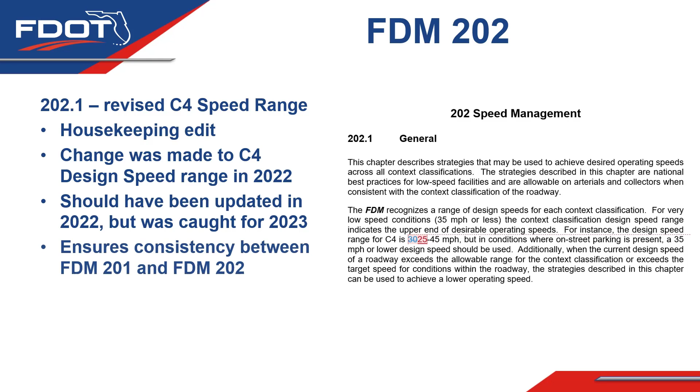Similarly, in FDM 202.2.1, we added that the target speed requirement is only for non-limited access facilities. This was stated plainly in FDM 201, but was not clearly stated in FDM 202. So this change, again, was a housekeeping edit. It was modified at the request of the districts just to ensure there is consistency between these two chapters. So that's all that was made there, and it's really just to provide that consistency.

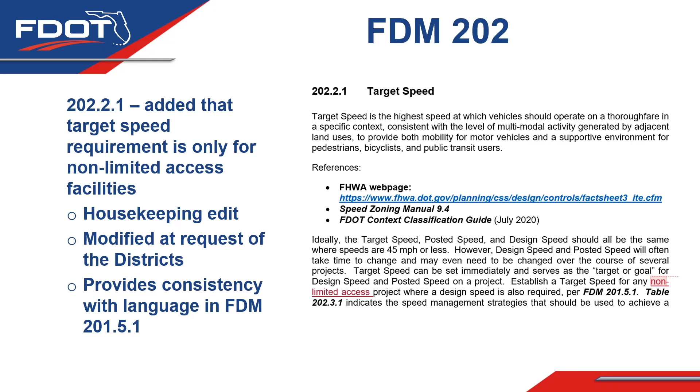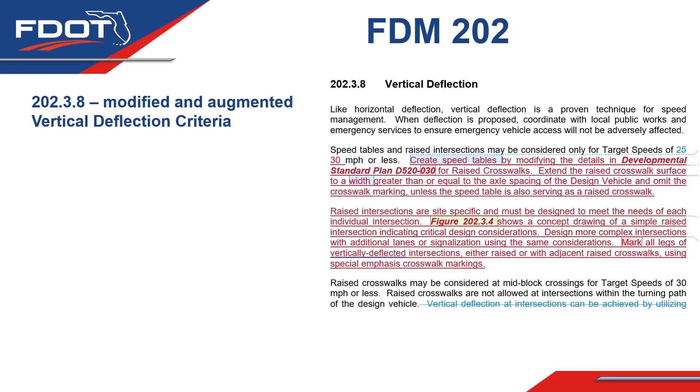The following changes were actual changes to criteria for 2024. The first one that we're going to talk about is the modification to 202.3.8, which is a modification and also a change or augmentation to the vertical deflection criteria that are found in this chapter. These modifications were made based on reviews of raised crosswalk projects that we've looked at over the last several years.

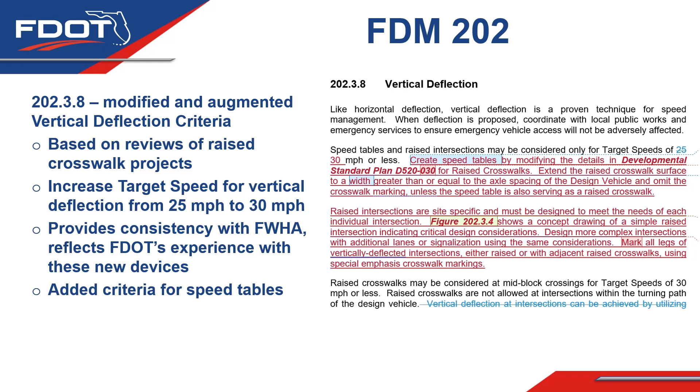We also increased the target speed for vertical deflection from 25 miles an hour to 30 miles an hour. And we made these changes mostly to provide consistency with FHWA, but it also reflects FDOT's own experience with using these new types of devices on our roadways. We also added criteria this year for speed tables, and we'll talk more about where that came from and what that looks like now. And we added some criteria and concept drawing for raised intersections, which are related to speed tables, and we'll talk about that as well over the next few slides.

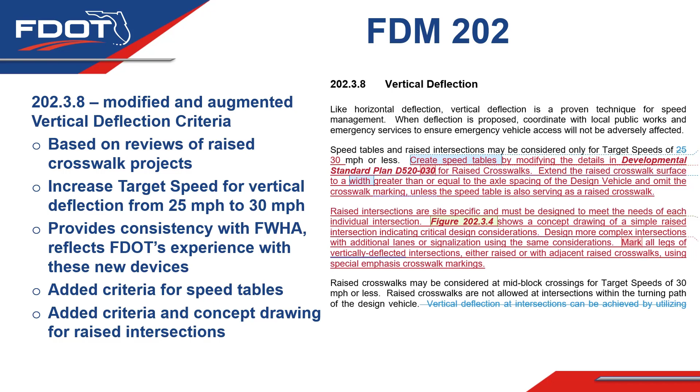So, increasing the target speed for vertical deflection to 30 miles an hour from 25 miles an hour. The way this used to work, as we said, you could use vertical deflection on roadways as long as you were trying to achieve 25 miles an hour or less. We did not really want you to apply those on roadways that we expected to operate at 30 miles an hour. However, since the original rollout of this criteria, we've had more experience with these types of devices and determined that it would be okay to use them on 30 mile an hour roads.

So if you're trying to get a road to 30 miles an hour, you can still use these vertical deflection devices. This is consistent with the language from FHWA as well, and it's consistent with the way the districts are actually using these devices, and we don't see any negative consequences of doing this, so we went ahead and made this change in the FDM.

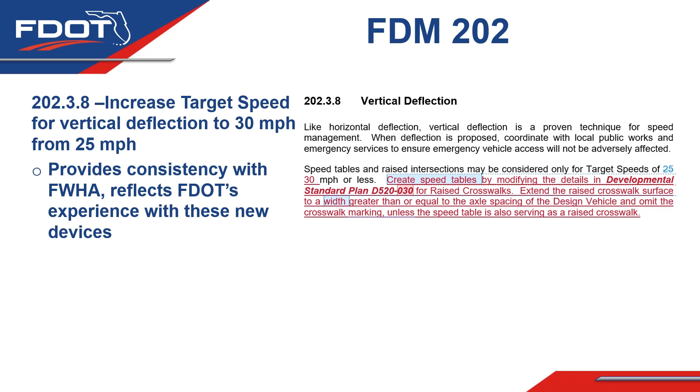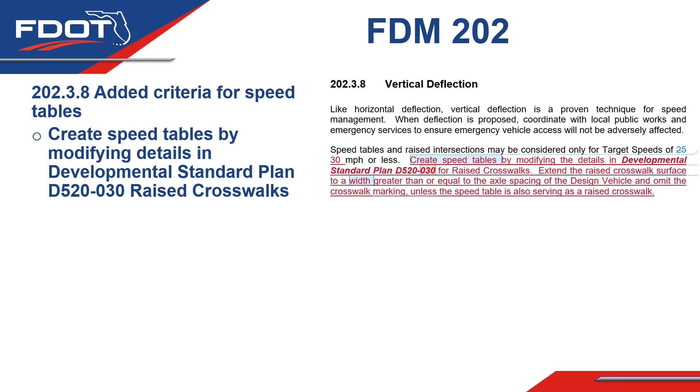Even though this raised crosswalk is wider than a conventional speed hump, it can create a bit of a rough passage for some types of vehicles crossing these things. And so the countermeasure for that was to use basically a wider raised crosswalk table, which we would call a speed table. So I'm trying to explain sort of how this is put together and how it works with the criteria that we have there. So the language says, create speed tables by modifying the details in Developmental Standard Plan D520-030 for raised crosswalks.

Extend the raised crosswalk surface to a width greater than or equal to the axle spacing of the design vehicle, and omit the crosswalk marking unless the speed table is also serving as a raised crosswalk. Well, let me explain a little bit what all that means.

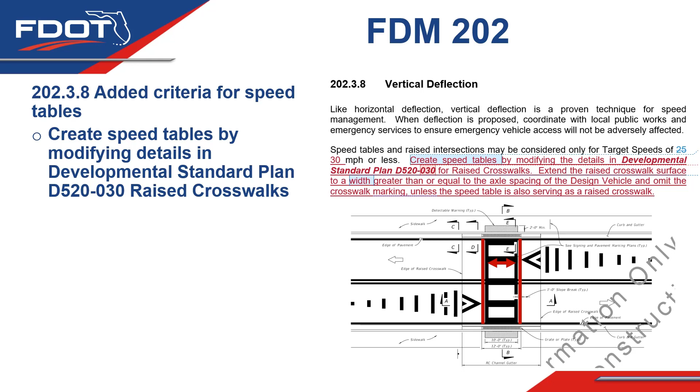And the way we show to do that is, these red lines represent where the edge of the tabletop would be for a raised crosswalk, basically as wide as the raised crosswalk. You want to extend that tabletop out so that it's going to be at least as wide as the wheelbase of your design vehicle. So in this case, we're showing the design vehicle as a city bus, which has a wheelbase of 25 feet. So I would want this to be at least 25 feet, probably a little bit wider, to accommodate that vehicle. If you had a different design vehicle with a different wheelbase, you could use that.

So maybe you're designing around a fire truck or something like this. City buses tend to be the most common thing that we're seeing. You'll need to check with your transit company locally and see what bus they use, but this is one of the city buses that's from AASHTO, and so we were using it for this example. So the idea is you want to extend this tabletop out so that it is at least as wide as this wheelbase, and this will provide a smoother crossing for that vehicle.

You can omit the crosswalk marking if you are only using this for speed management. Now, if you are also using it as a mid-block crosswalk, then you can leave that marking in. It can be put in the middle, it can be put on one end or the other. You really have a lot of flexibility as to where exactly you would put that crosswalk marking. So just use your best judgment on that.

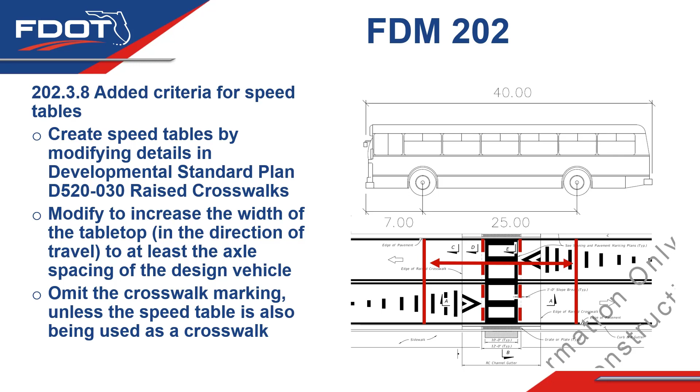I'll give you a little more of an example of what this would look like. So at the top here, you can see this is a speed table, and the length of this table, along the direction the vehicle is traveling, is the same as the wheelbase of the vehicle. And this is a drawing from AutoTurn actually, that shows the deflection of this vehicle as it crosses these different types of vertical deflections.

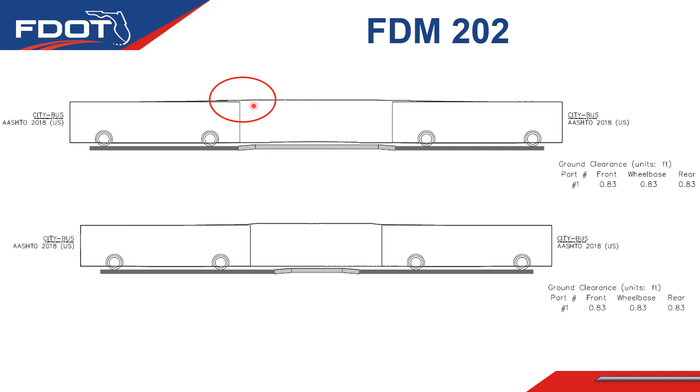And I want you to see the amount of deflection that takes place is relatively slim here as I'm crossing this speed table. On the other hand, if I'm crossing a raised crosswalk down here, you can see I get quite a bit more deflection in those conditions. So right here you can see the deflection is a little bit higher. And we wanted to illustrate this by showing you a short movie. So grab your popcorn and we'll show you the movie.

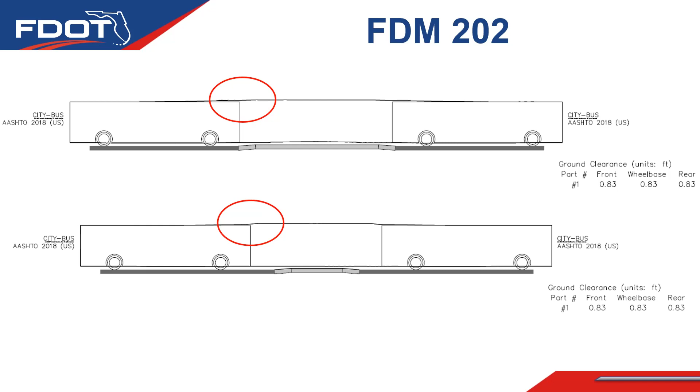So this is a bus riding over a conventional raised crosswalk type design, and you can sort of see there's some up and then some down. Passengers riding on that bus are going to definitely feel that they're moving in rapid succession in two directions. They're going up and suddenly they're going down and they're going up and down again. So there's a lot going on there.

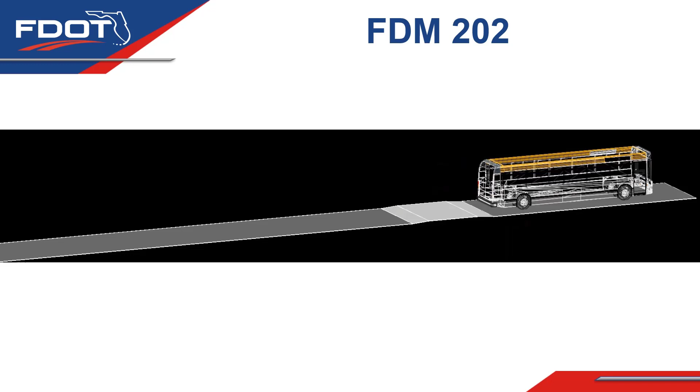Now for the longer speed table where it's more like the wheelbase, the front wheels of the bus will go up, the back wheels will be okay, then both sets of wheels will be on the speed table, and then the front and then the back go down. So it's a much smoother set of transitions for the folks who are in that vehicle. So let's see what that looks like. All right, and that is a much smoother transition.

Anyone who's ever been in a bus riding over something like this will appreciate that, or even in your automobile, you can feel it. Certainly fire trucks, emergency services vehicles, ambulances will appreciate this wider speed table approach. So in places where you need it, we now have this speed table offered in the FDM as an option for you to use. You don't have to use it. It's just one more tool in the toolbox. But in places where you feel there might be some concerns with the raised crosswalk design for particular types of vehicles, we have this other option available for you.

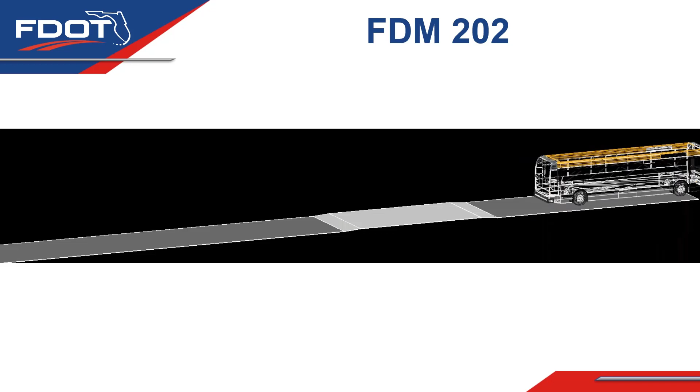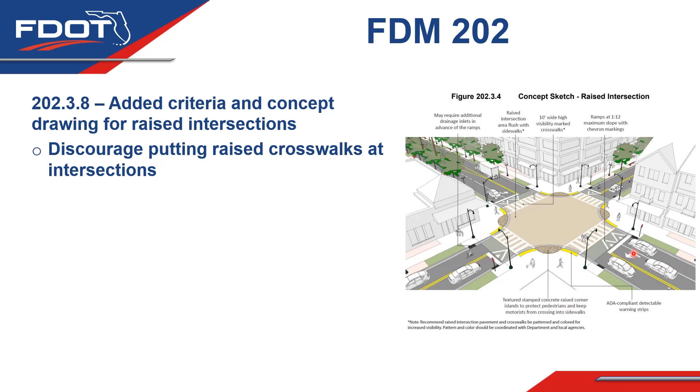This was problematic because we wanted to avoid putting vehicles, particularly imagine a large vehicle like a bus or something maybe a little more unwieldy, like a large single unit truck or even a tractor trailer, in a situation where they're kind of turning in two planes at one time. So they're not only moving up and down, they might also be turning at the same time, which is what you can get into if you have one of these vertical deflections, raised crosswalks at an intersection. The preferred way to do that is actually just to raise the entire intersection.

This is not a new technique. Raised intersections have been around a long time. You may have designed them before. The department has them here and there. We've just never really had any kind of criteria for them or any kind of a standard plan. We still don't have a standard plan for them. That's because intersections are unique animals. Everyone's a little different. So we weren't able to give you a standard plan for that.

But what we could give you are some standard considerations to use every time you design one of these things. And then you, as the designer or the planner, go out and make your best effort at this and try to incorporate these concepts behind it. So we'll talk about what those different concepts are. But the notion is we want to avoid having vehicles going up and down and side to side all at the same time. So we want to raise the entire intersection rather than put a raised crosswalk at an intersection. And we'll call out these different items that the designers need to consider.

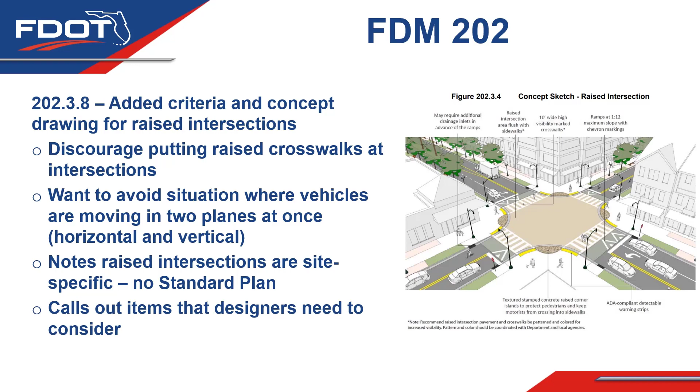So as you do the raised intersection, what we want to do is raise it up so that the crosswalks across the intersection are at the same level as the sidewalk. So that's one of the nice things for pedestrians. When you come to a raised intersection, you don't have to go up or down. You just continue at the same level that you were at on the sidewalk. So that's the height at which we want the raised intersection to be raised. It should be flush with the surrounding sidewalks.

As you approach the raised intersection, you want to have a 1 to 12 ramp. This is the exact same ramp design that is in the raised crosswalk standard plan. So you can go to that standard plan and pull that ramp design out of there. That's the exact same one, and we want to have this on the approach and exit from the raised intersection. So that's kind of already there for you. If you need to know how to draw one of those, you can use that standard plan.

One of the issues we've had is that as vehicles are making a right turn, let's say this vehicle here wants to turn and go this way, we don't want them cutting the corner and maybe chopping off the corner of this. And keep in mind, we are now raising the vehicle up to where it's the same height as the crosswalk, so it'll be pretty easy to do that. A number of reasons we don't want that to happen. Could be pedestrians there for one thing. Also, we don't want cars getting onto the sidewalk or something like this.

So there's a few ways to address this, but the way that the department has determined would be best on our system is to use basically a raised and textured island of some kind at the corner right here. We're saying textured stamped concrete at this raised corner island. It could be something else.

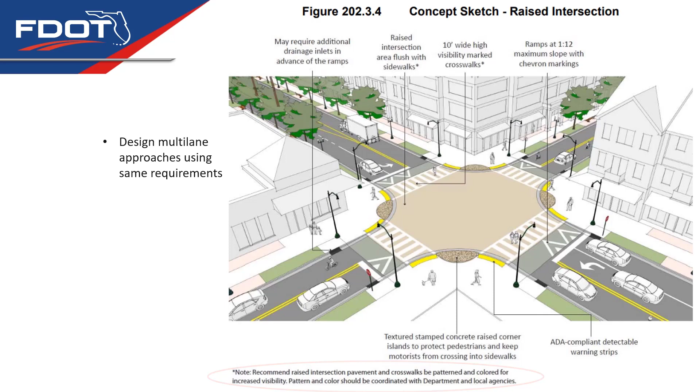Now, this is shown using single lane approaches. If you had multi-lane approaches, you essentially would use the exact same set of requirements here or recommendations. That would not change. Engineering judgment will be required when you do these. Again, we cannot give you a standard plan to do one of these things because every intersection is a little bit different, but you're going to have to put together different elements of designing a roadway and designing an intersection on your own to come up with the way that this would look.

So for instance, we can give you a standard plan for that ramp that comes up and leaves the intersection. But as far as how exactly you do the detailing about the intersection with the curb radius and how exactly the drainage has to work and all those things, even the lighting, which there's lighting shown here, that doesn't mean you have to use exactly those types of aesthetic lamp posts.

There may be something else that would be more appropriate for your local area. That is, again, up to you and your judgment as you are designing this. So there will be some engineering judgment required. There will also be some creativity required. This is, again, not something we can give you in a completely canned fashion. This is not a cookbook. You're just going to have to look at the different elements that are required and do some design and exercise some creativity in the construction and design of these things.

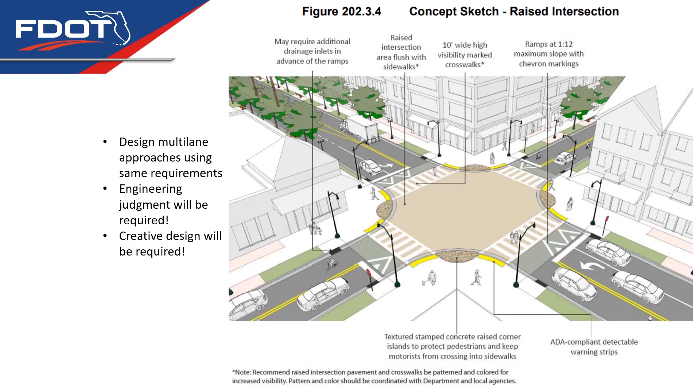All right, the last item we have to update you on for this chapter is for Table 202.3.1. If you're familiar with this chapter at all, you may have recognized how this table looked before. This table is located at the end of the section that describes all the speed management strategies, and what it does is it brings them all together in one table. We've had some complaints about that table in years past, that it wasn't necessarily the easiest table to read, and so we wanted to try to modify it a bit.

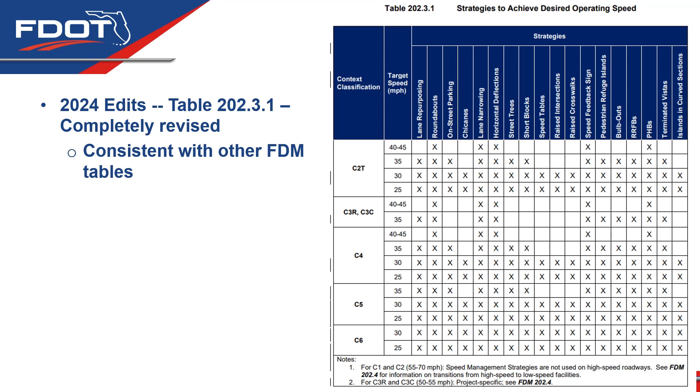This is to make it a little more consistent with the look of some of the other tables in the FDM. So let me show you what this is actually explaining to you. The idea is to help you see at a glance which strategies and target speeds and context classifications would go together. So let's say, for instance, that we know we're in a context classification C4. This might be a general neighborhood context classification somewhere in one of our cities. We know that we're trying to achieve a target speed of 35 miles an hour.

And so which of these different strategies that you see at the top here will be most appropriate to use in a C4 trying to reach 35 miles an hour? As you look across the page here, all those X's are indicating those would be your first go-to options. Now, there are other techniques listed that would not be favored right off. You may determine on your project you actually do need those, and there's ways that you can get those, but this is to give you an idea right up front which techniques would be appropriate in these different locations. So hopefully you'll find this table easier to use and to read than its previous incarnation. We appreciate any feedback that you might have on it as you use this table.

A couple of footnotes. In the original table, the one that was in the 2023 and previous versions of the FDM, there were rows for C1 and C2 context classifications. Well, here's the thing. The C1 and C2 context classifications on the state highway system are high-speed conditions. 55 to 70 miles an hour is the design speed for those roadways. We really don't use speed management when you're trying to achieve those speeds. At those speeds, you're going in the other direction, and you're trying to make the road as safe as possible for the highest speed that you can design for. So we didn't think it was appropriate to have C1 and C2 in this table, because all it said was if you're doing those, go look at FDM 202.4 to see how to design it. It really didn't have anything helpful to tell you anyway. So we just took those out, and that gave us a little more room to put the other information in there.